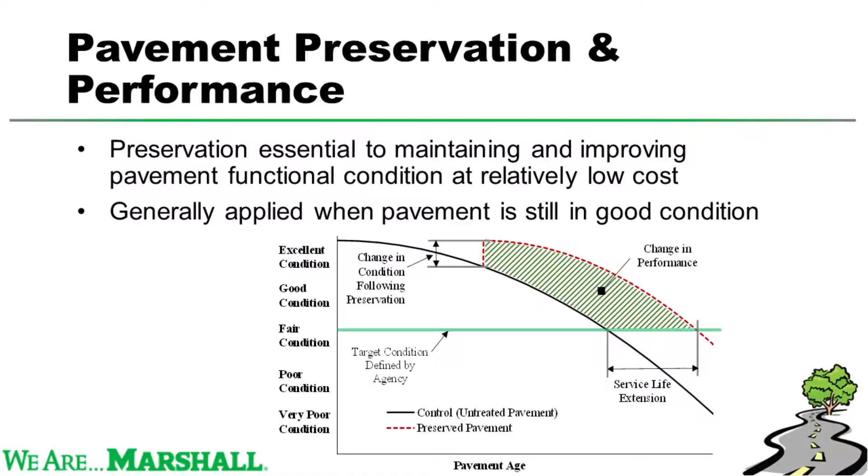We'll go through this. But one key thing I want to point out is this figure here. And this is where the whole it depends aspect comes from. Because when we talk about pavement preservation, we all know what preservation is, right? We've got a couple working definitions, Federal Highway, AASHTO, they're all out there. But fundamentally what we're talking about is while the road's in good condition, we're going to do something, right? And that something that we do, whether it's a thin overlay or chip seal or whatever it is, likely it's going to have some immediate change in condition.

Maybe it won't be. And likely you're going to have some change in performance, right? Or maybe we want to capture that. So in order to understand when we're actually supposed to apply that, we have to understand the behavior of both of those, that initial jump and that change in performance, right? So if I apply a chip seal and I'm concerned with IRI, I'm not going to see that immediate jump in condition. Just heads up, your chip seals are not expected to immediately change your IRI. However, I can expect a change in performance. That fundamentally affects the timing that we'll look at.

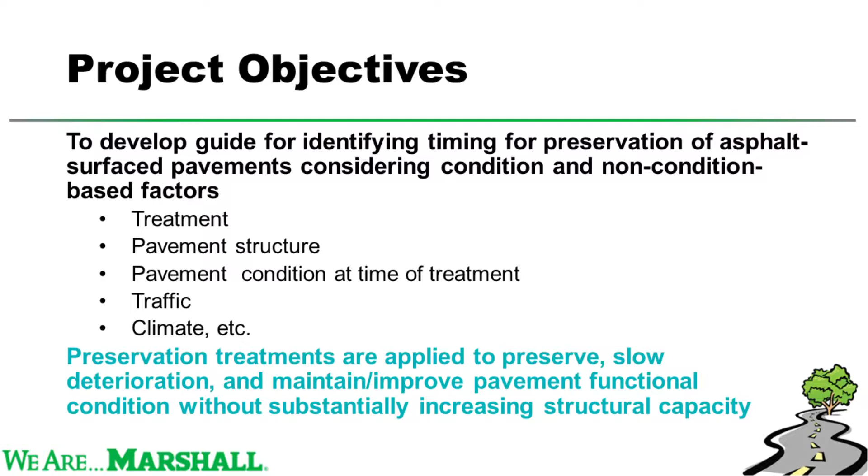And again, we know, and thank you again, Dr. Hall, two duh statements, something that everybody in here should know. Apply preservation when the pavement's in good condition, right? Don't apply preservation if you've got massive holes in your road. And it's a relatively low-cost treatment. NCHRP Project 14-38 was fundamentally about answering the question, when should we apply pavement preservation? And how does that timing change as a function of various factors? You know, your pavement structure, your traffic, your climate conditions, etc.

One of the most interesting things that happened in answering this question, though, was in asking a different question very similar to what you just saw, right? Because we took a deep dive into statistics. I'm a huge number nerd, data guy through and through. And so with my wife sitting here saying, hey, let's watch Netflix, and I'm like, no, I've got MATLAB open, I'm going through these numbers, it's so exciting.

One of the key findings we had was you can't decorrelate any of these because the structural design engineer considered things like climate, structure, traffic, etc. So they designed it for that, and then we want to turn around and use that to predict performance. It turns out to actually be a big mess. First phase of the project, we went through the literature review to find timing approaches. What we found were there were a couple approaches, but it all boiled down to a cost-benefit analysis. Right?

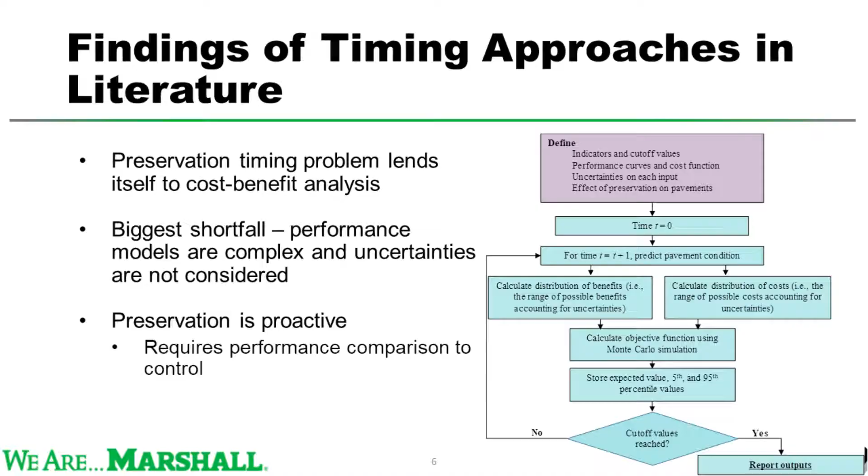Look at the cost of applying a pavement treatment, look at the benefits that you get, divide the two values, and there you go. You should get your timing. There's a few bits of research looking at material changes, but if you extrapolate out what that is, that fundamentally too is a cost-benefit analysis, right? Because you want to apply it whenever you maximize the benefits.

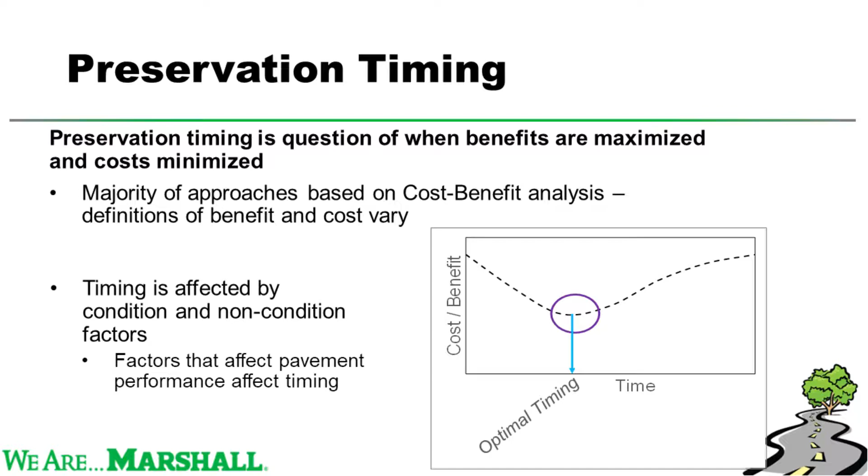What that looks like is to say, if I apply it too early, then I'm not going to get my maximum benefit. If I apply it too late, I'm not going to get my maximum benefit. I've got costs that change throughout time, so where is that low point?

So we looked at several areas, and one of the first questions is, can we define a consistent set of costs? We pulled data in from 10 different states, and to answer that question, no, we can't define a consistent set of costs. The costs are all over the board. We were able to pull together a good set of guidance, but the way that Arkansas defines pavement costs, what they include is at one single lump sum, versus the way that Louisiana defines it versus the way that Tennessee defines it, just in their database to try to extract this data, the answer was no.

How do we consider uncertainties? We actually do a deep dive in the report, because as we started gathering the data from agencies, we found that y'all's data is pretty messy. And that means that if we're going to try to predict something, we can't give exactly 3.472 years to apply your pavement preservation treatment if the data is plus or minus 10 years, right? So how do we actually consider that? And then how do we compare costs and benefits?

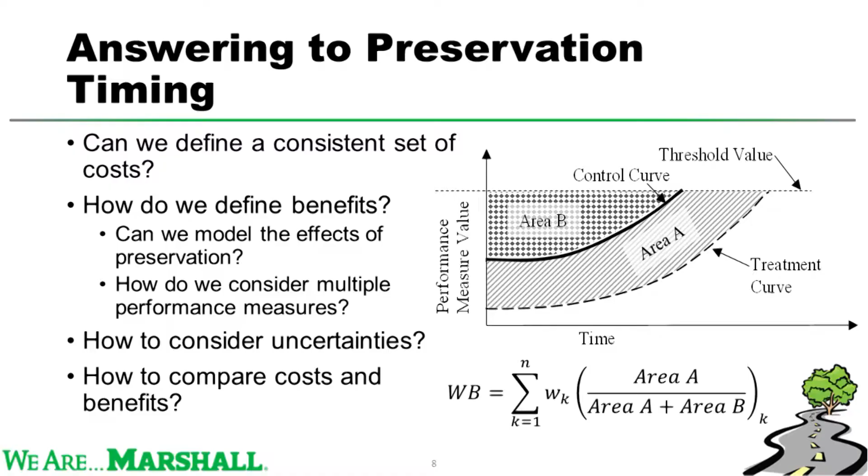So we went into phase 2 of this project, and we said, okay, clearly one of the key questions to answer is, can we model the effects of preservation? Can we get that jump, and can we get that change in performance? During phase 1 of the project, we went through the literature, and the literature was all over the place. There are actually papers and technical reports that say, no, you can't get that data, or those data do not exist. There's a few journal articles written by the folks over there in the ivory tower that say, yes, these data do exist. So we said, okay, let's go out and see.

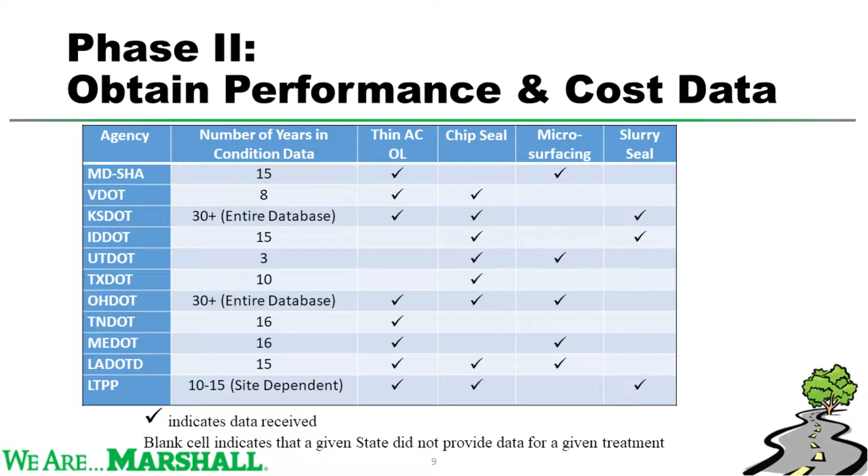Let's see what agencies are willing to give us data. Give us everything you have across the board. Can we model those? And we actually got a decent amount of data. You could see Kansas. They have a massive database of pavement condition, treatments, materials, all across the board. The next thing we had to say was, okay, well, lots of these data, they're not consistent. We want to actually try to work with a consistent set of values.

So for example, if I'm looking at one agency's database and they have their climate split out into regions 1 through 4, and another state's database and they have their climate split out in regions 1 through 4, what does that mean, right? If one state's Alaska and the other state's Florida, it doesn't really mean a lot.

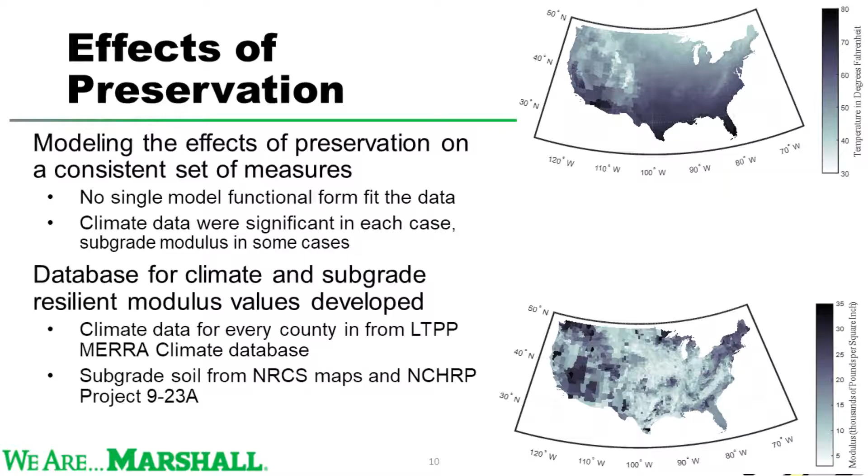So we looked as part of this research, and we developed a consistent set of features just in terms of subgrade soil and climate. So we were able to actually pull from LTPP, which stores the MERRA climate data now, the good old NASA data. And we actually developed values for every county in the US. The reason we did it for county level is because that's really kind of the finest grain that most agencies can give it to us. And we did the same for subgrade soil maps using a previous NCHRP project. I won't go into the details of making those maps. It was fun.

The next thing we had to look at, like I said, was y'all's data is messy. How do I know what I'm looking at, if it actually received a treatment or not? So we got into the weeds with some detailed statistical analyses and artificial intelligence, like you saw, actually machine learning. We ended up developing an algorithm that predicted, okay, this agency gave me these data.

They said nothing should have happened to these roads. Something should have happened to these roads. How much can I trust it? We go through in the report how you can implement this. Actually, it's more simple than it sounds in your agency.

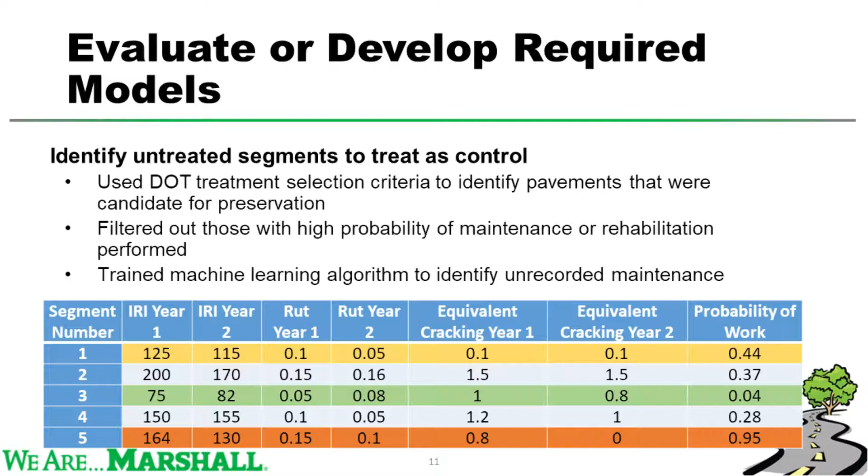But here I show a couple examples from the state of Kansas. Right, so in this case, you can see my IRI goes from 125 to 115 one year to the next. My rutting is 1/10 of an inch down to 5/100ths of an inch. And my transverse cracking, which is that equivalent cracking, stays the same.

Did something happen to that pavement between the 2 years? I don't know. My IRI went down slightly. My rutting went down. Maybe they did some rut leveling. I don't know. So when we started looking at that, we developed an algorithm. And again, it's in the research report if you really want to dig into the weeds, or you can always email me. As you can tell, I love talking about this stuff.

To figure out, okay, clearly there's some sections where there was no work done, right? 4% probability that anything was done there. Clearly there's some sections that something happened, right? Your cracking went down all the way, your rutting was reduced, and your IRI was reduced.

The other thing we used this for was we were able to go through and extract from y'all's data a set of what we called control pavements. We defined those as pavements that should have been candidates for preservation but did not receive preservation. That's about as clear as the definition that you can actually apply to the databases without making way too many assumptions. And so we use this algorithm to then go through and filter out all those data.

That way, for each state, what we ended up with is a set of preservation, right? These set of roads received thin overlays. These set of roads are control pavements, and then we can compare, okay, what happens if you apply the preservation versus what happens if you don't apply the preservation. This is basically the set of models that we were able to develop.

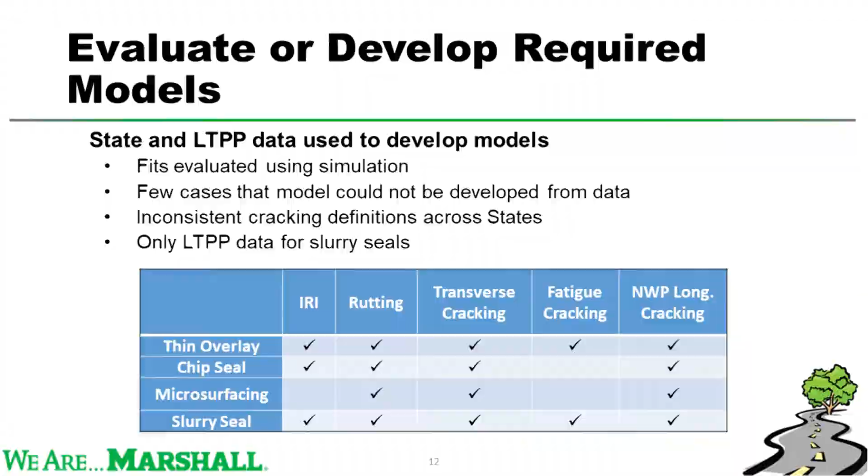When we look at, again, we're finding that initial condition jump, that initial change in condition, if there's anything, and differences in long-term performance as a function of whatever performance measure you care about. Do you care about IRI, rutting, transverse cracking, fatigue cracking, or non-wheel path longitudinal cracking? You can see we didn't get models for everything. Clearly the data do not exist for everything. But we were able to get a decent set of models.

Jason Dietz actually brought up earlier the fact that I'd be bringing some examples from the EDC4. And actually, we were able to pull these models and this model development into that EDC4 project and show how these models could clearly identify the when and where of pavement preservation.

Some interesting features we noticed was that for some reason, across DOTs and the LTPP, there was transverse cracking left after you applied a chip seal. Again, and I'm not going to be shy about it. I'm an academic. I love pavements. I love pavement performance. But I'm also not a field guy, right? I've been in the field and seen chip seals laid. It still didn't make a lot of sense to me that you would have cracking after your chip seal.

We pulled all the state data out and said, okay, well, the LTPP, because you have measurements within a month or two after these chip seals are applied, in some cases 5 or 6 months, but still. And we still see transverse cracking after the chip seal was applied. We boiled it down to try to figure out, okay, what factor is predicting that? And it turns out the strongest predictor is the quantity of low severity transverse cracking, which still made me scratch my head. So I stopped trying to answer that because our project was running out of budget.

Another thing that we looked at, and again, we're looking at state and LTPP data here, is what do we do with negative growth rates? What do I mean by negative growth rates? I mean those pavement sections where if you look at the IRI in year 0 and you look at the IRI over 10 years, it looks like it's a self-healing pavement. The thing's getting smoother, right? That's the kind of pavement we actually want to build in general. You all would be out of jobs if that were the case. So what do we do with those negative growth rates?

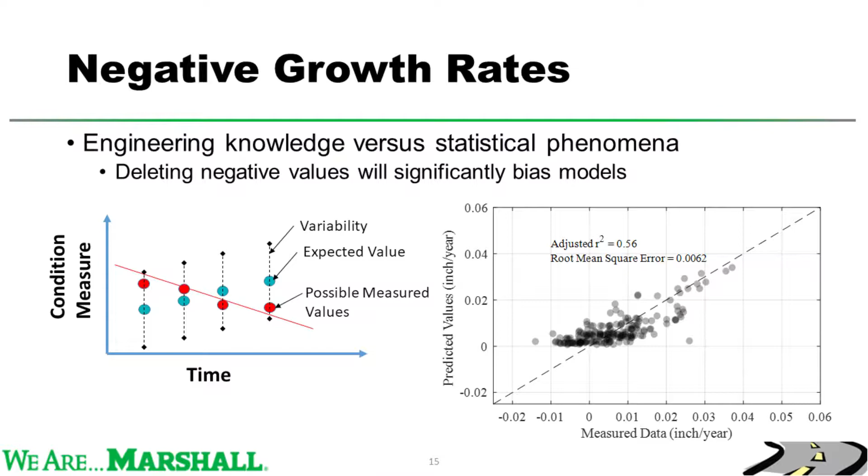Like I said, here's where your data should be. The blue dots are where your data should be, right? We all expect IRI increases over time, cracking increases over time. You measure that data at a network level, and that's how much uncertainty you have, right, between the diamonds. Which means it's actually statistically likely if you get 100 pavements that a small number of them will actually look like this. So you're going to fit a negative line to it.

Right? So once you understand where it comes from, then you can understand how you treat it. You don't throw it out. You do some fancy statistical modeling that we're not going to talk about here, and get something that looks like this, where my measured data still shows quite a bit of negative growth rates, but I'm not predicting something that's negative. Again, we go through that in the report in detail. So let's look at what we found.

I want to take a step back here and say that what we did is something called exploratory data analysis. We wanted to understand what are the factors behind pavement performance when it relates to preservation, and how does that affect timing? So some of these models you'll kind of scratch your head about a little bit. These models are not optimized for predicting, right? They're meant to investigate the data and show how each of these factors affect timing so that we can go back and say, okay, your timing models need to look like this.

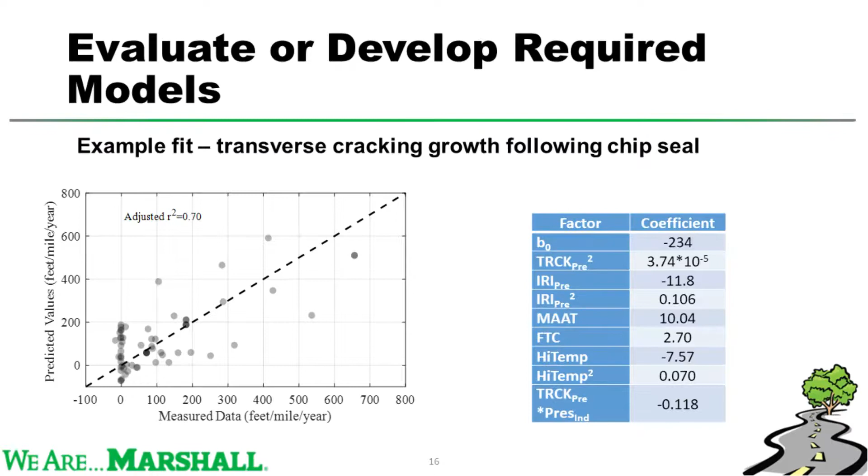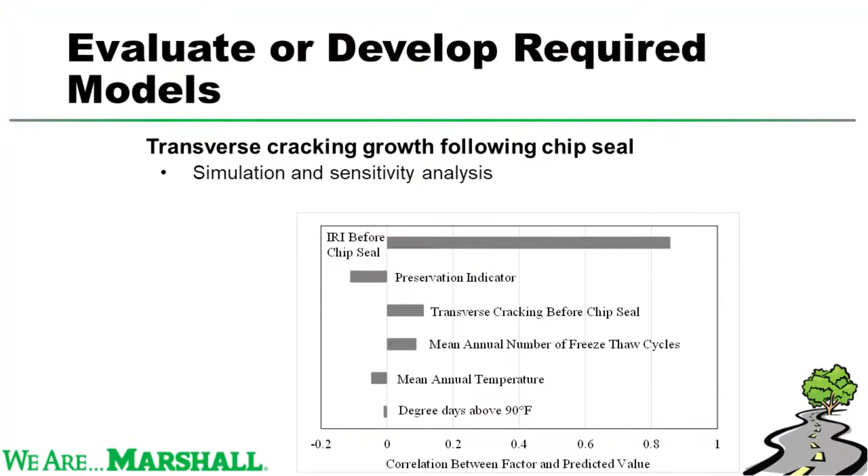So with that being said, here's a decent model. In my own time, I developed a really cool model that actually accounted for the fact that many pavements didn't start experiencing cracking. But that's what a decent model looks like. We did a sensitivity analysis to find out what's affecting these. And this was one of the interesting cases: this is a transverse cracking growth model following a chip seal, but it's most sensitive to your IRI before your chip seal's placed. We spent quite a bit of time on this model just to verify that, and it's true.

So that tells you there's something more fundamental, right? That tells you a pavement is a system. IRI, cracking, rutting, they're all a big concern. Of course, if you apply preservation, this preservation indicator, you get a negative correlation, which just means your cracking growth rate goes down if you apply preservation, whereas if your IRI is higher, then your cracking growth rate goes up. And so it made sense.

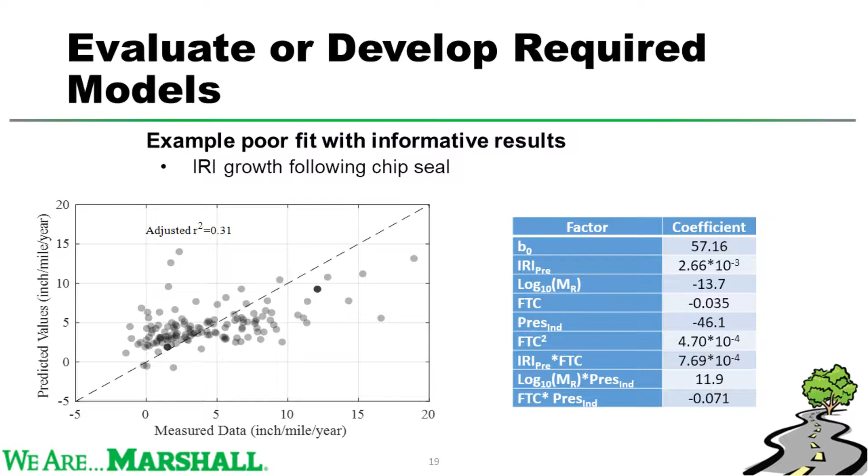We still get good information out of this in terms of saying your IRI growth rate following a chip seal is reduced if you apply preservation. That's not as important as your subgrade resilient modulus, your IRI before your chip seal, or your freeze-thaw cycles. It still has an effect.

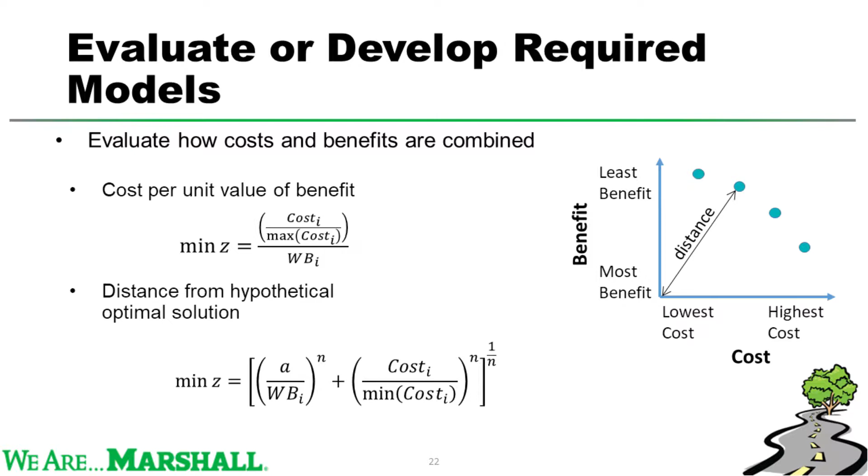Y'all's data's a mess. So then we combined cost and benefits. We didn't use just a simple cost divided by benefits. We didn't try to monetize the benefit. We showed why you should combine the costs and benefits that way. It's less sensitive. Again, it's in the report.

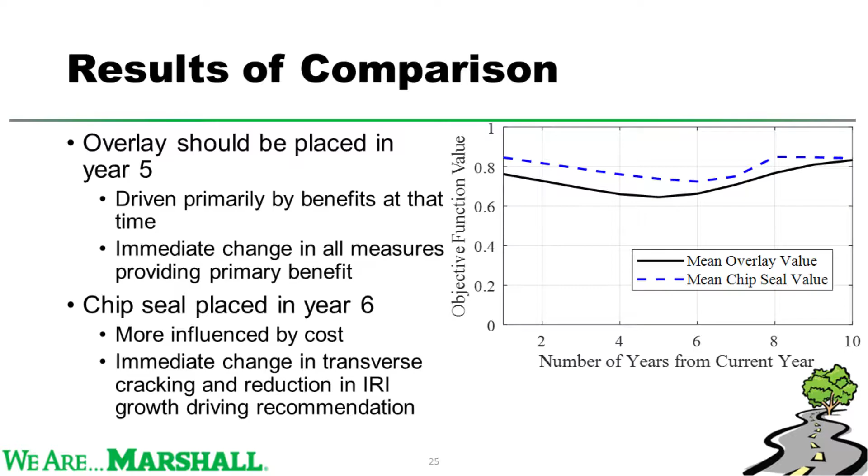The other thing that we see is when you look at the overlay being applied in year 5, it's driven primarily by the benefits that you get from the immediate change in condition, whereas applying the chip seal is mostly influenced by cost and the immediate change in your transverse cracking, but also the long-term change in your performance. The timing of pavement preservation fundamentally depends on what performance measure you care about, whether that specific treatment affects both the jump and the change in performance, or only one. In theory, it would be at least one. If it affected nothing, then you're wasting your money.

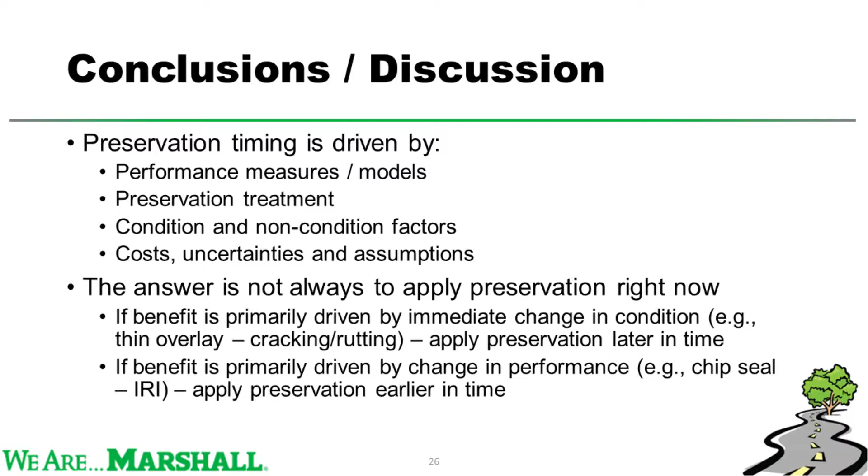So what we said is, okay, the answer is not always to apply preservation right now. Sometimes, if the benefits come from that immediate jump, wait till the future to apply it. On the other hand, if the benefits come from the change in performance, like we saw with the IRI growth here, then maybe it is to apply it right now.

Again, if you care about IRI and that's your main change in performance.

But the question that I have: you came up with these models, but have you incorporated the life of the treatment itself into your model? So let's say for chip seals, for example, the nationwide average is 5 years, right? One of the most common distresses we have with chip seals is raveling, aggregate loss. Some states report even 3 years to failure of chip seals. Then all of the performance levels, cracking or ride quality, will be significantly low. So how do you account for that in the model?

So your question is, how do I account for the life of the treatment in my model? My answer to you is to refer to the previous presenter who so clearly asked, how do you define life? And it's a good question because that's actually what we started looking at. How do we define life? We looked at literature. There was some literature in Indiana, for example, that said your microsurfacing, and I know the researchers, by the way, great researchers, can extend your rutting life by 15 years. We said, holy cow, that's a huge number.